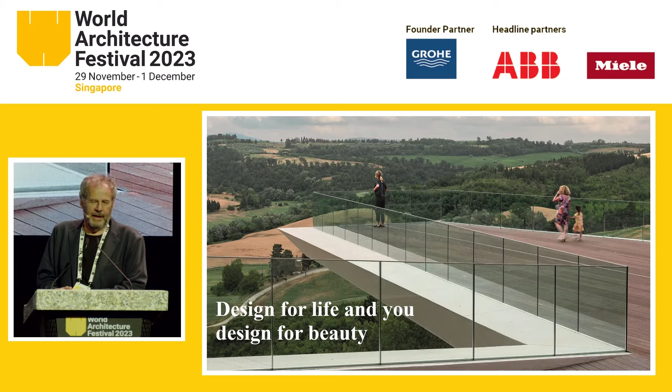So I was just starting to make some of the value of our work, and I always try to remember that we design buildings for the others, not for ourselves. We design buildings for life. And if possible, we design to make a design for beauty.

This is a little project we did in Tuscany. In a historical center, we designed a square which is a cantilever in the landscape, and it becomes the new destination for people as a place for gathering.

Also the question has arisen in the last years about what is the role of an architect. Is it only to answer questions, or maybe help to make questions to our client, explorers and interpreters, researchers and storytellers, analysts and artisans.

So we are also in the line between the analogic and digital world in architecture. How much can we be digital and at the same time artisan, because buildings today are still made by hand. And also our work is made by hand.

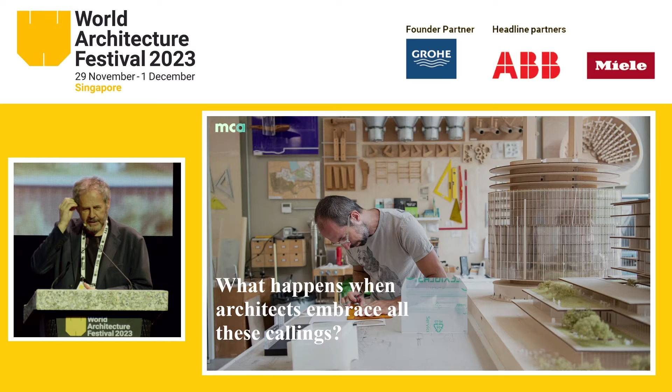And so the question is, what happens when architects embrace all these callings? How can we answer all these new questions? And there are some values which I'd like to share with you.

One is about sustainability. It's one of the key discussions everywhere in the world today, about how we can make more sustainable architecture. And I like to change this word into creative with empathy, which I think is a better definition of what sustainability means.

Empathy is an attitude, an attitude in relation with people. We try to understand the others, but also try to understand the place where you work. Get some information by data. Be empathic with the place where you work in.

At the same time, creativity cannot become extravaganza. If you're using empathy, then you need to combine your idea of creativity also related to the place where you work. So I think this combination is what makes me feel more comfortable about the definition of sustainability.

And also, designing sustainability from every angle is not only about performance, of course, it's about the way you design your building. I strongly believe sustainability is not a technological issue. It's not about the performance of machines, but the way we design buildings, how we design buildings adapting to the climate to get the best relation with energy.

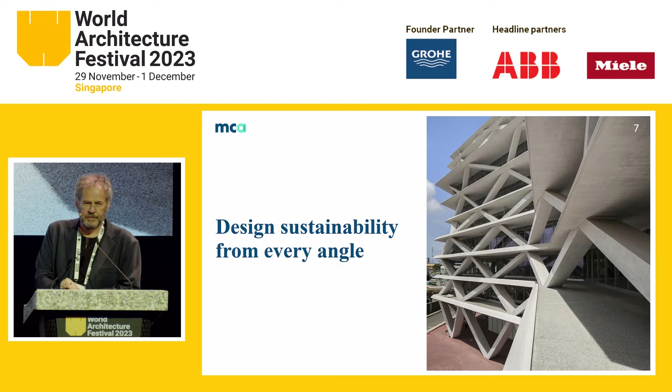You need to know the angle, the direction. All of these things can help us design better buildings in terms of performance results. So I think it's really an architectural issue more than a technological issue. And also, what does beauty mean.

Beauty's concept changes in time. What was beautiful 20 years ago is not today; it's another concept. I think what we're looking for today in beauty also means something invisible. It's not only about aesthetic, it's about what the buildings mean, what kind of relation it's able to create with the place, with people.

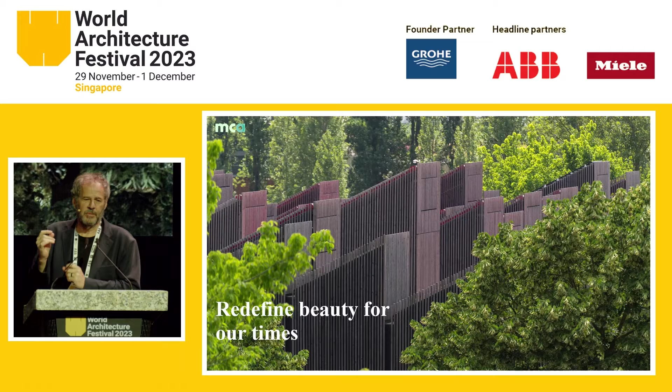This, I will show you later, is a building for the Agency for Environmental Protection. It's designed with 120 chimneys, creating this connection between daylighting and ventilation, which I'll show you later, and also leading the way with open arms.

I'm sure everyone here is a professional, and you know how much our work can become contaminated by different knowledge. I think we need to be quite open to understand other levels of knowledge about communities, technologies, climate, ecology. We need to be open to accept all this knowledge to make better buildings.

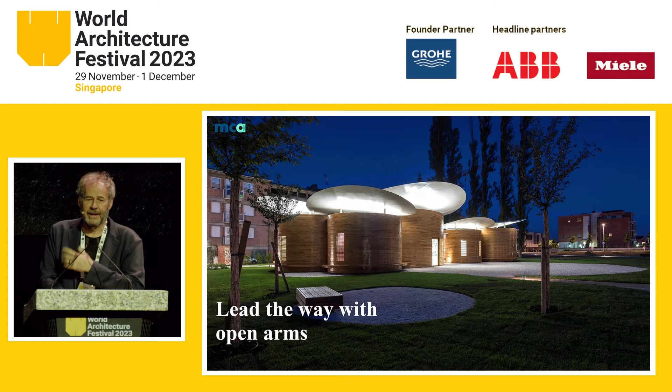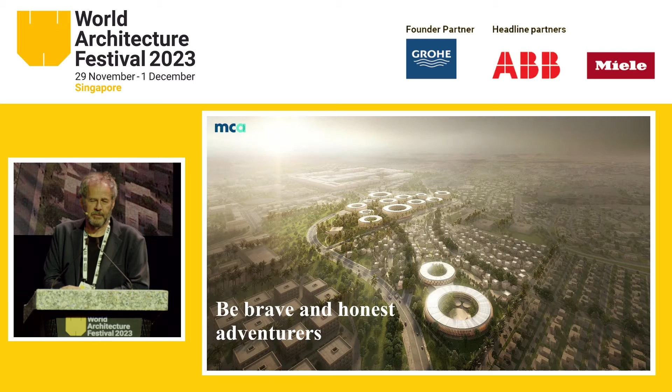For me, brave and honest adventurers means I think we need to be very honest at this stage of our life about sustainability. We are not yet started, we're just in the beginning. So I'm a little bit not against, but it's funny for me to talk about a zero impact building, which is not true. We need to design and build buildings for our life, but we can improve and make better buildings. We need to also tell the truth, the stories about the impact of buildings. Buildings are made for humans.

Just to remind some of the discussion about sustainability, that's why we made this timeline outside, because you can see the history from the past, the very past, see how architecture changed, and then what happened after the Industrial Revolution, and what happened in the last few years.

This timeline is about the starting point in 1992 - actually the German passive house standard was in 1991. Every year, next week actually, COP28 starts in Dubai. Every year there's a report from the United Nations called COP, and every year there's a new regulation. So the road is very clear, the journey is very clear, the direction. And for us the direction is the roadmap 2030 and 2050.

Many things happened, regulations in the countries. Pope Francis wrote an amazing book about our home, the planet, and he said something nobody said before: there's poverty in terms of financial poverty, poverty in terms of food - people don't have access to food - but there's also building poverty. Many people live in very poor quality buildings, and those people will suffer more from climate change, because buildings are really an issue, also in Europe, not just around the world. We need to pay attention to these kinds of things too.

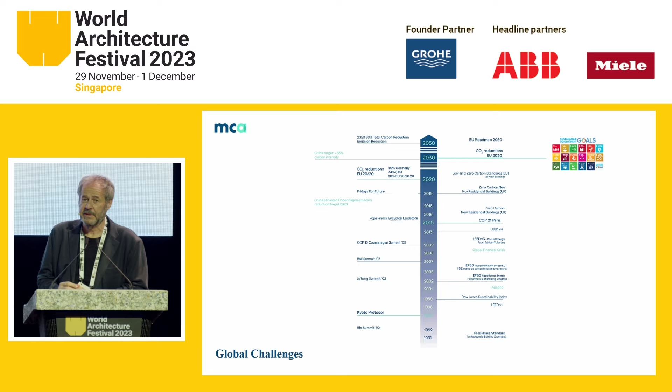The objective for 2030 is reducing 45% of CO2 emissions, and for 2050, 80% of emissions. It's a very ambitious plan. That's what I'm saying - we're only starting to make some changes about materials, designs, and how we can improve our cities.

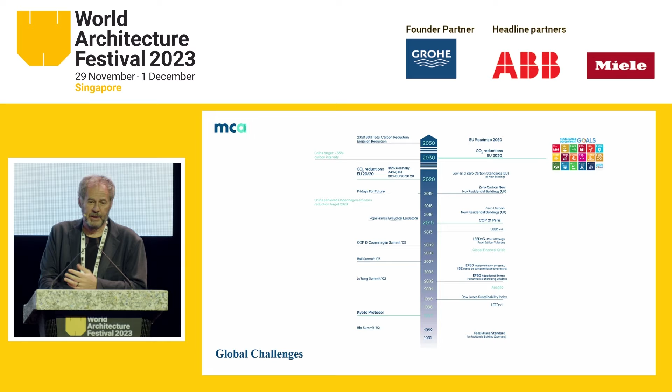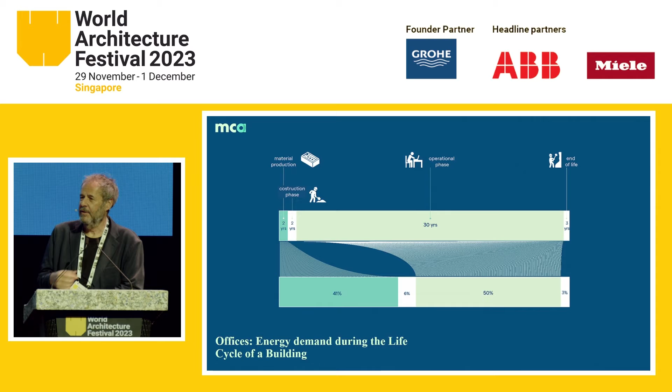One important thing to know is that we are very concentrated on the performance of buildings, the consumption of buildings. But if you see this diagram of the life of a building over 30 years, half of the emissions are related to the material, the construction. We've done a lot of work on performance - we can make buildings at 7 kilowatts per square meter per year, whereas 20 years ago it was 300 to 400. But we need to do a lot of work on construction materials, the new generation of steel, concrete - there's a lot of work on recycling. So the effort now really goes into the life cycle of material.

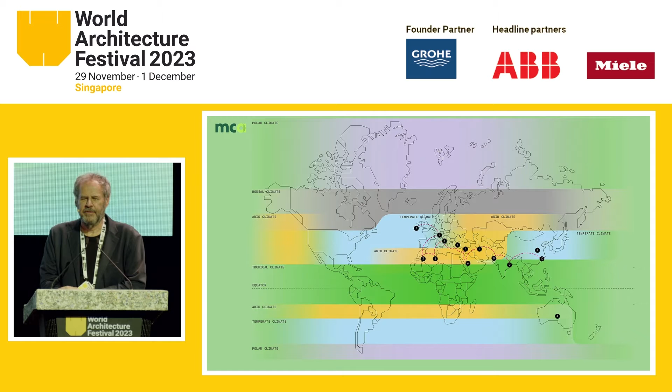Going back to history, which is the major argument of today - I was writing this little booklet called 'The Future is a Journey to the Past.' You can find it in the bookshop if you like. It's 10 stories about architecture, because I was thinking to make a trip for my 60th birthday, then COVID of course canceled all these things. I thought to make a trip from a place I already knew, from the north of Ireland to China, and finally through Asia, Africa to China. There are 10 buildings which I find very interesting to study.

For very simple reasons: how did we make buildings before the Industrial Revolution, with no energy? What happened before? Because now we concentrate on performance, energy, machines, but how did we do it before? There's a story of buildings before the Industrial Revolution where we designed buildings in an empathic way with the climate, because that was the only energy available, and we connected energy, buildings, shape, aesthetic - because that was the rule of architecture.

So I'll only tell you two stories. One is the Hiding or Invisible City. Then you remember this film, Skywalker comes back home and finds all the family dead.

This photo is taken in the desert of Tunisia. And George Lucas, when he's writing this film, said 'a long time ago in a galaxy far, far away,' which means we already live in another galaxy.

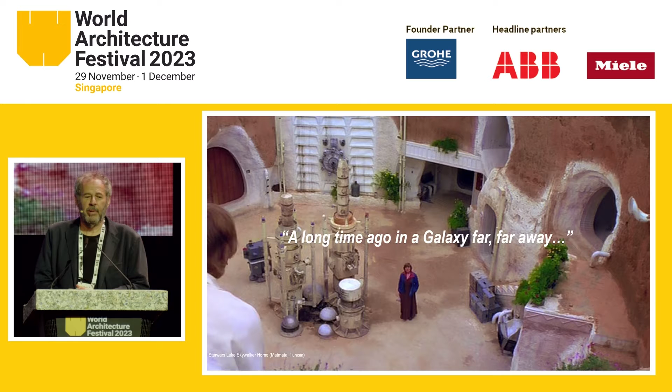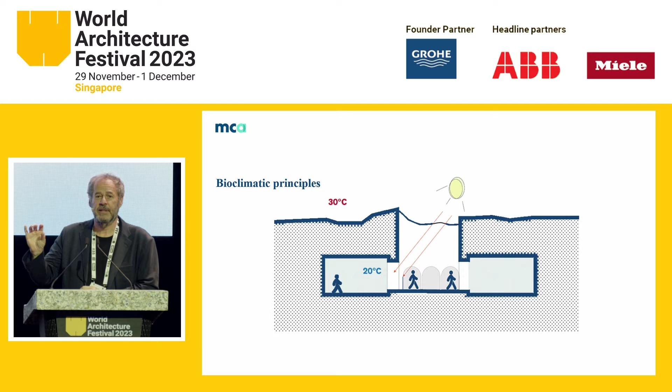Back home on the planet Earth, the most modern place on the planet was this house in Tunisia, where the Tunisian people, like the Chinese, built their buildings underground for a good reason: the rock was easy to excavate, and outside there would be 30, 40, 50 degrees, but inside the temperature is constant, between 17 and 20 degrees.

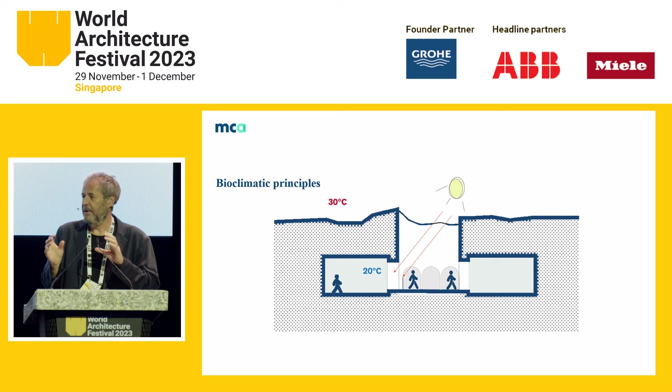But they open a little courtyard for ventilation, creating a condition that is not against the climate but an answer to it. The Chinese made amazing cities too, what we call a hiding city in Henan province. It's so beautiful - a courtyard as a common space, with all the rooms around, and a garden on level 0.

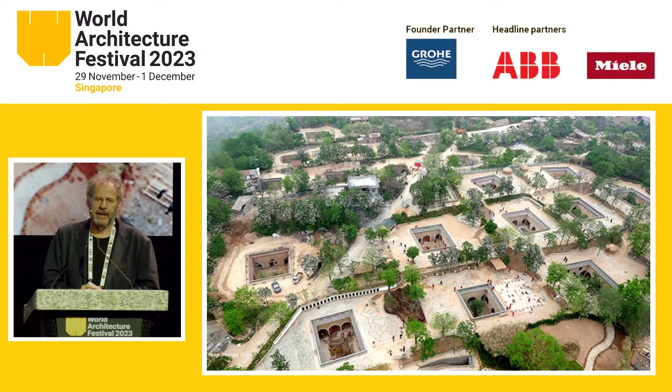I thought we forgot the complexity in the way we did buildings. There wasn't only one way, there were so many ways of adapting to the climate. I'm fascinated by this because I think we lost a bit of this complexity. We build buildings the same everywhere around the world, independent of climate. And I like the idea that there was a story and knowledge.

Why am I interested in this, not to do it again, but in the way the people were thinking. They were thinking about how to deal with their climate, with this material in that specific context, and give you an answer. And the most interesting thing was...

Marco Polo - the story is from Venice to China, crossing all of Asia. And then when he went back to Venice, sailing the South China Sea, Indian Ocean, arriving in Hormuz in Iran, then going to Constantinople, Istanbul - he says in his book that he went to a desert village, and the people offered him ice cream.

That was the 13th century. How could people make ice in the desert? This is a crazy story, no? Because you need a lot of knowledge to do it.

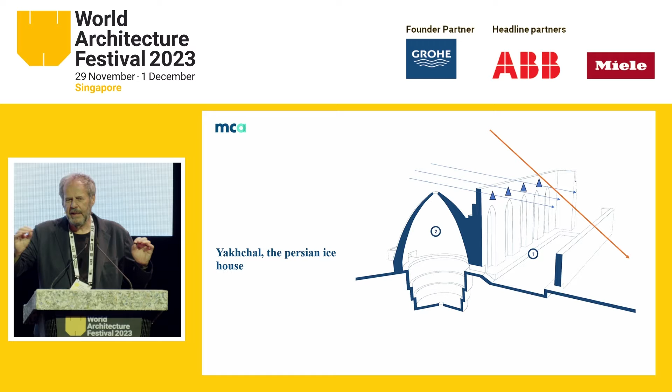The people in Persia took 300 years to understand this. They build a wall that can be 100 meters long, and behind the wall is a shallow pool, and behind the pool is another wall. You see the orange line is the winter angle of the sun - behind the wall, there's no solar gain during the day.

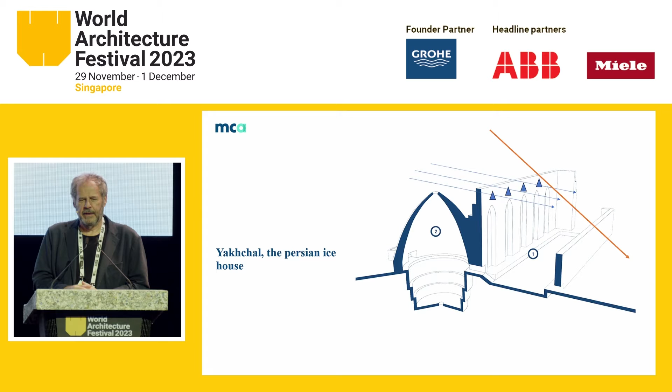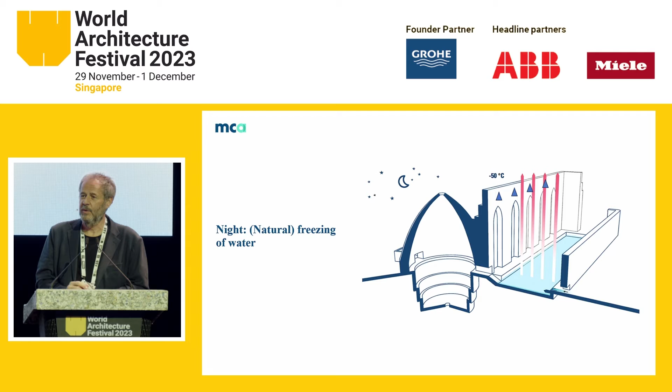Then in front of the wall, they make an excavation, a dome and a sort of tank. So what happens is they put water in at night, very shallow water, and because the sky is minus 50 degrees, the effect of the cold sky sucks all the heat from the water, freezing it.

Night after night, in this pool, the Persian people take a piece of ice and put it in the tank. Then in summertime, the dome protects it from solar radiation by ventilating the place, and they make this called a yakhchal, which still exists in Iran - there was ice cream with noodles and fruit.

So I was shocked by the way they already had many principles of thermodynamics - freezing from the sky, ventilation, air speed, the aerodynamic aspect of the design.

But that is the scale - you see the scale, it's huge. So I think they were very ambitious also in the way they made these things.

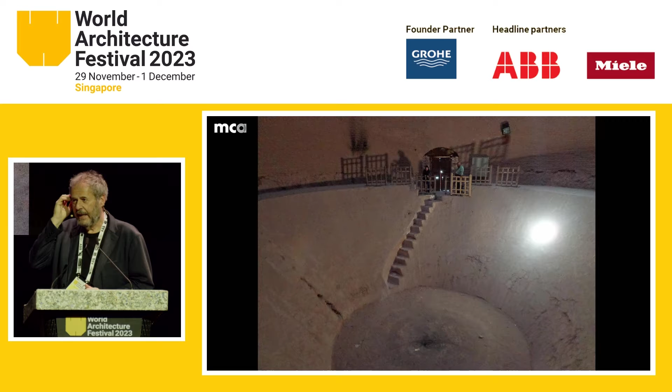And of course we make ice much more easily today, we're not going to do that again. But I'm fascinated by the people who were thinking - they could make ice by studying cooling, then maybe design a wall, and then protect it. So it's the process of thinking.

I think we need to think again, because if we want to do zero impact building, you need to find again this empathy with climate. You can't do it without this kind of thinking. That's why I'm fascinated in reading that.

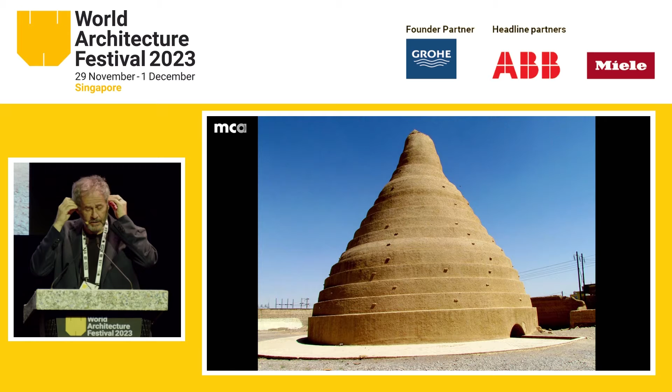There are many beautiful stories in India, in China, in Saudi Arabia, in North Africa. You can read that a little bit - in the booklet there are 10 stories. I don't want to sell you the book, but if you get it, you can find many stories.

There's also another place where we can find inspiration for this idea of sustainable buildings, and that's the world of plants. Plants have been on the planet for 450 million years. We, Homo sapiens, for 300,000 years.

We're able to make a lot of damage in this time, but anyway, that's our stories. The adaptation of plants to climate is 450 million years old.

Professor Mancuso, if you look on the internet, has video experiments showing the intelligence of plants, because it's a neurology for plants. So it's believed that plants have another level of intelligence.

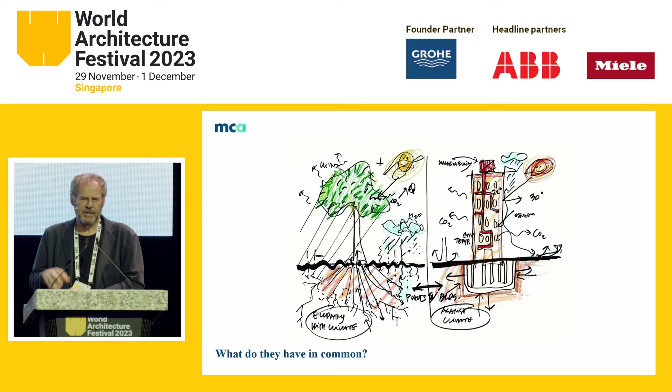And how we've been building in the last decades, maybe now it's improving, but we are against the climate. We don't want to know what's happening outside. We seal the building, use a machine, and we don't know whether it's raining or sunny, it doesn't matter. Then the foundation, I don't want it connecting with the earth, with temperature, or with anything. So we design buildings really against the climate.

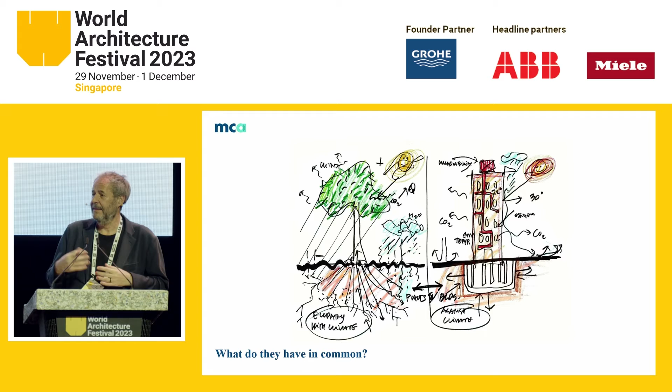So now the point is how much we can learn from plants to make better buildings. And I think plants can tell us so many stories about adapting to different climates.

The shape is a sphere, so half the plant is under shade during the day, it's not under sun all the time. And the leaves are triangular, so between the leaves there's a shading part where the temperature is different, meaning ventilation between the leaves.

When it's very hot, the top of the plant is white with a very thin spine, because that's the point where the sun is much hotter. So it's reflecting the light that's not absorbed by the plant, and the spine on the leaves — of course they defend against animals because it's juicy, but also the spine takes water from the air. So when the temperature changes, the little water in the air condenses at the top of the spine, and this drop of water goes inside the plant.

The question is, how does this plant know? How do they know how to adapt themselves? Behind the shape, behind the way it's made, there's a strong connection with that climate. This plant is able to survive in such a difficult context. So we are very far away from that knowledge, very far away.

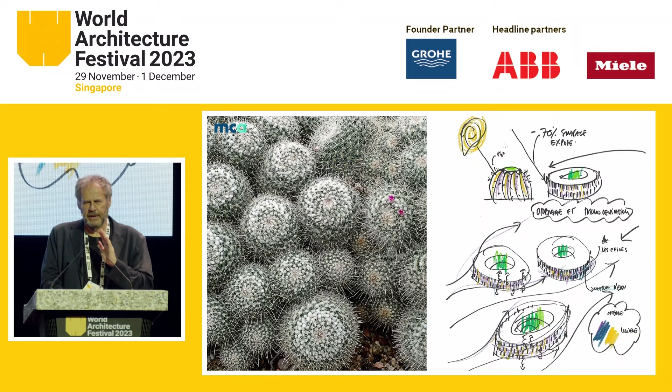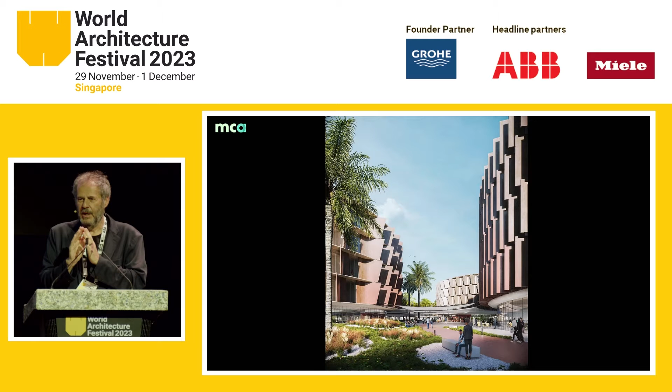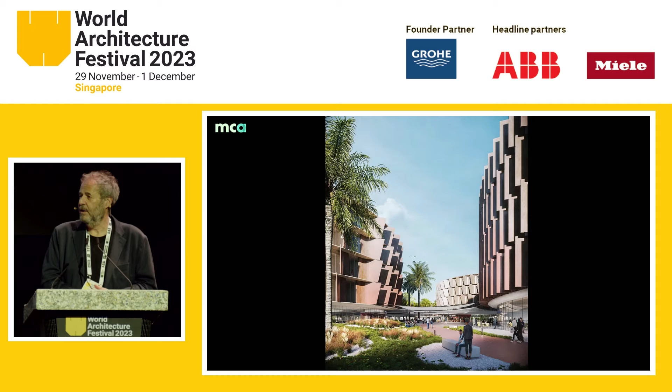So we designed horizontal shades around the buildings, creating a sort of light and shadow, light and shadow. So all the facade is under shadow, but there's also a microclimate between the small pieces of terracotta shielding around it. So I think we don't design a cactus, but the cactus tells us a lot about how we can design our buildings.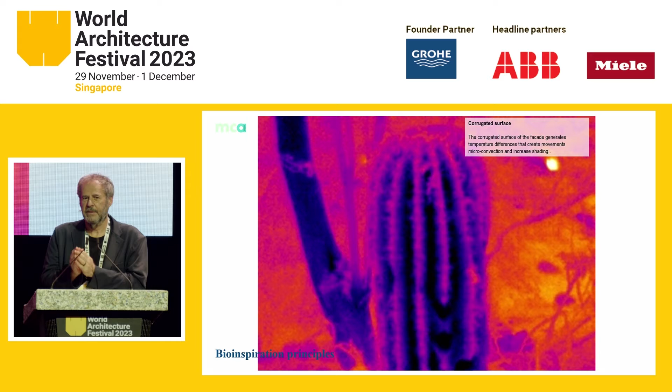And of course, you can see this thermal picture — you see the difference between the red and the darkness. That's the temperature difference between the external surface and the leaves, meaning that shape is made to survive in a very difficult context. So it's about the design of this plant. And that's the courtyard, using recycled water, the only place we can plant trees.

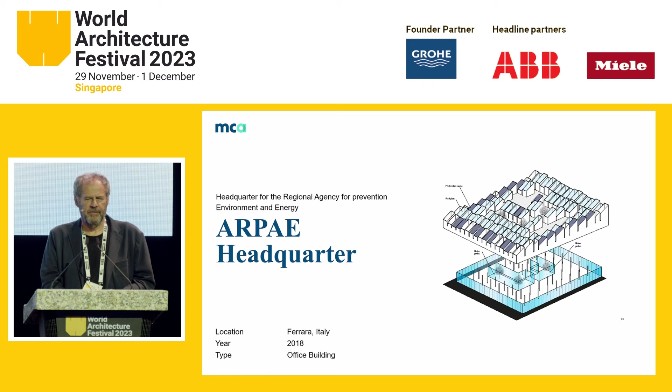Just to give you another example of this connection, we designed this building for the headquarters of a regional agency for environmental and energy prevention, inspired by this city in Pakistan, which is a wind-catcher city.

They catch the wind at night with this kind of kite, and the wind gets inside the house, keeping this cool air during the day through the thermal curve — it gets given back as cooling over 7 hours. So during the day there might be 50 degrees outside, but inside it'll be maybe 4 or 5 degrees less, which is a lot of energy. It doesn't matter the exact numbers, it's the difference between the temperatures that gives you comfort.

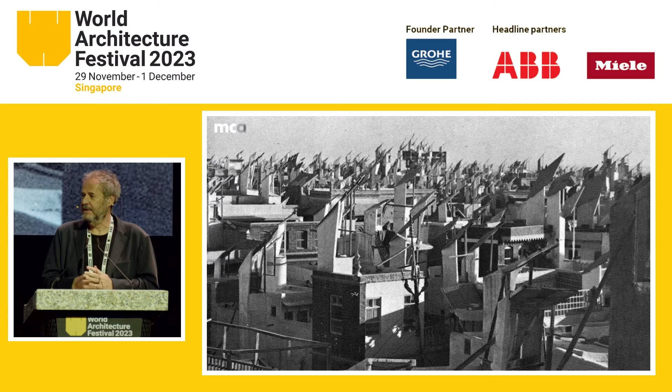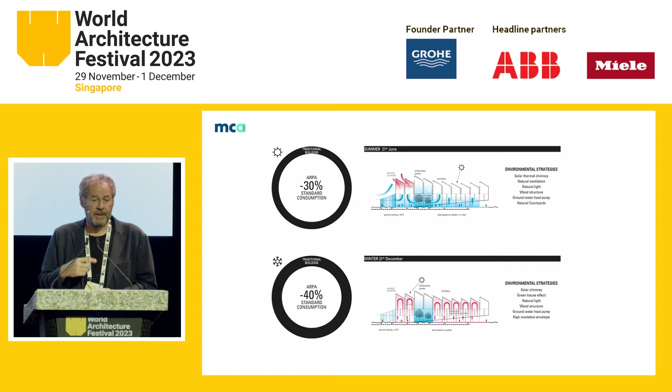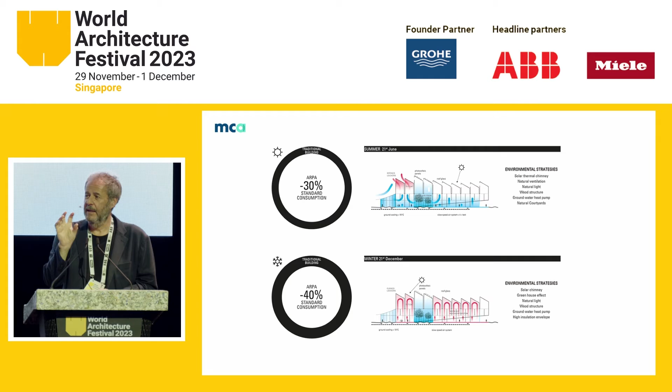So we designed this building with 120 chimneys, which improves the daylighting — it's an office and laboratory. At the same time, in summertime, it increases ventilation inside the office by taking cool air from the floor and exhausting the hot air. At the same time, in wintertime, we can use the glasshouse effect and heating from the sun inside the building.

That's, of course, not enough to make a zero energy building, but reducing 30% of cooling and 40% of heating has a huge impact on the size of the machinery and the kilowatts consumed, only from the shape of the building. It's all wood construction, prefabricated, so very quick to build.

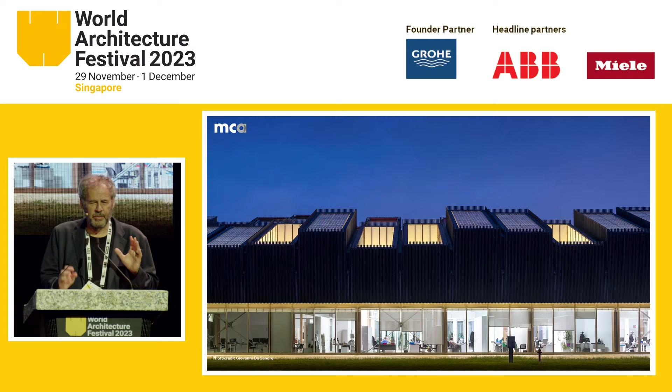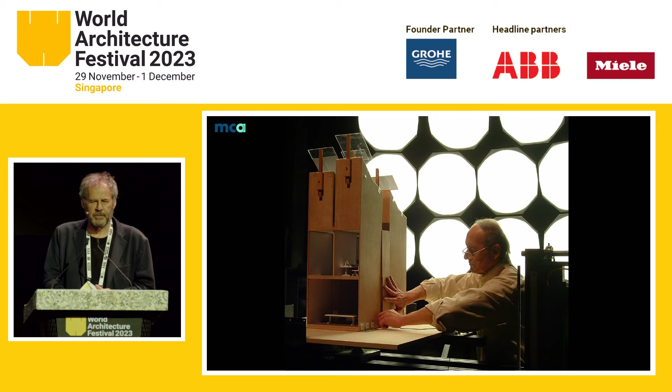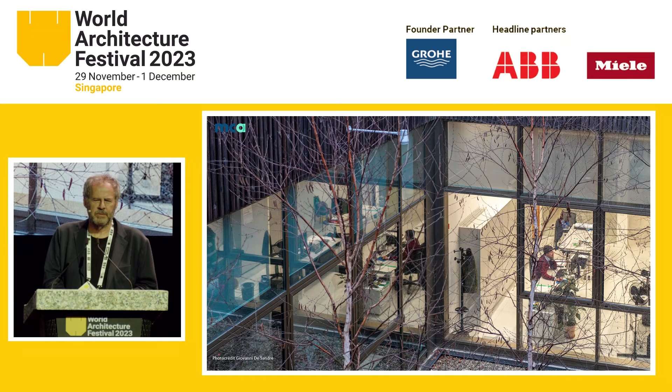And then we do daylight analysis. Of course, today it's easy by digital program, but we did for many years by using artificial sky to analyze the quality of the day and the intensity of the light. And there's very sober, very simple office buildings.

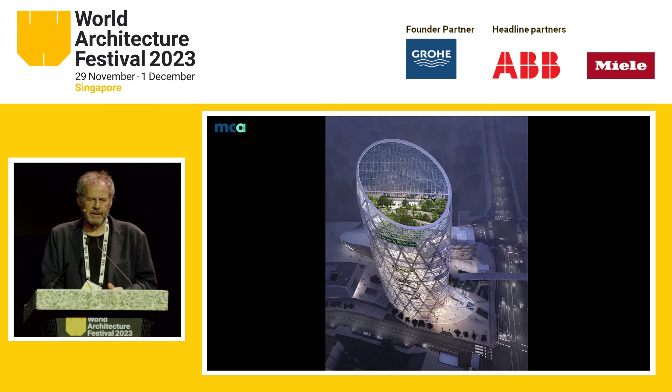And then with the same principle, we are now almost finished a tower in Milan, which is complete now. There are another few months, but it's finished. It's in the city center, and particularly the shape of the tower is facing south. The south face of the tower is a problem in the wintertime when the sun is low. It gets inside of your tower, and then what you normally do is you close the windows and put on the light.

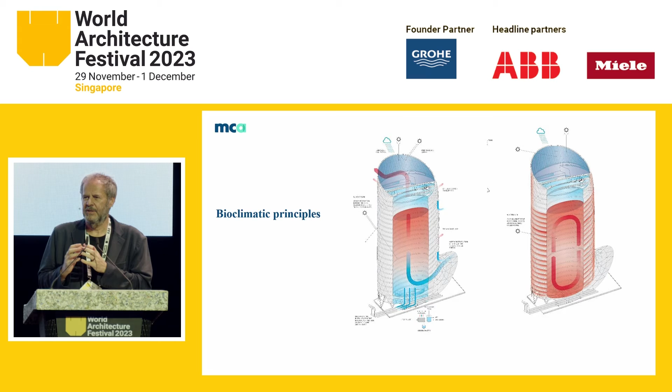So we made the south face of the tower an atrium of 17 floors, empty, and we're using this empty space as a climate moderator. So reusing the heating in the wintertime, and also ventilating and recuperating the heating in the summertime. Of course, that's not enough to make a free-running building, but again, the shape of the building is suggesting this kind of strategy with the shape of the building.

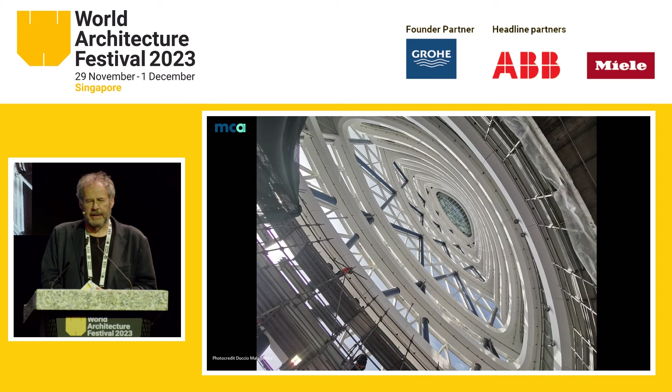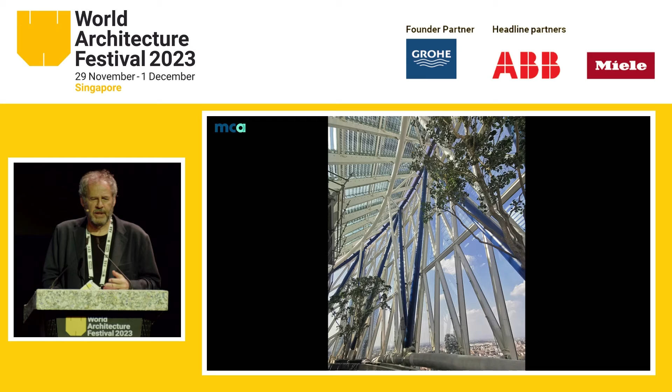That's the atrium, but that's almost finished. And the top floor is a glass house, not a conditioned place, and is like a very large lounge. We're now planting trees, and the photovoltaics is on the roof to shade the building.

So just an example of how much the design can be influenced by this kind of relation. It's pure geometry, but adapting to different conditions, because at the top it was cut by urban regulation by 60 degrees, so we stretch the tower, creating this sort of ellipse. And the bottom part is a piazza, and the facade changes shape, adapting to the public space.

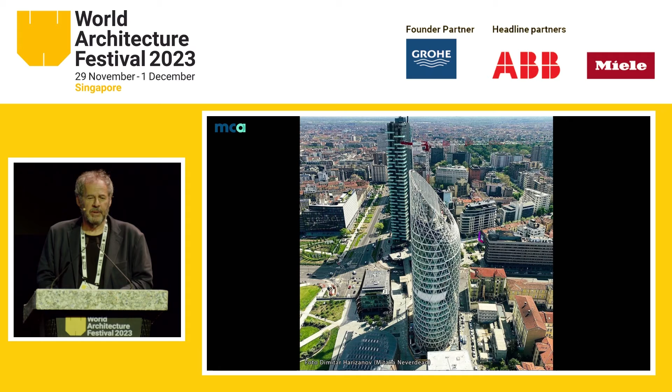This is almost it. We have the last two projects, and then we'll have a chat with Jeremy. We just completed a museum in Milan, made for an Etruscan collection of art. And the most interesting part of the museum, apart from the shape and the objects, is the content.

The story of objects produced by Etruscan artistic or artisan work was to help people in the journey to another life. This is the beginning of the religion. We are in 10 centuries of civilization, between the 10th century before Christ until the Roman Empire. And this collection is about the 4th and 5th century before Christ - the black vase, shiny black vase.

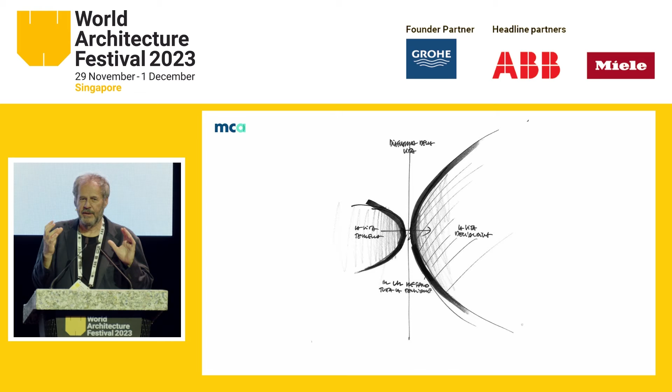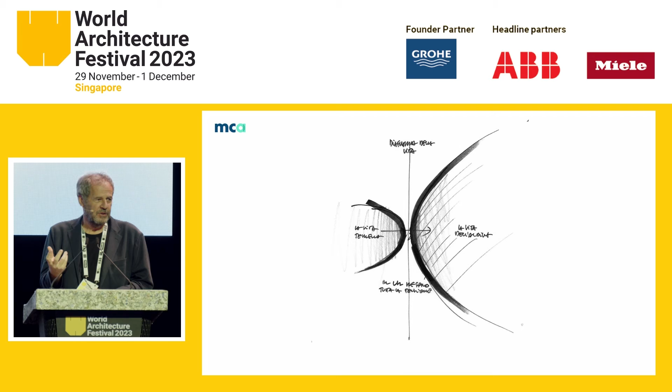But why did they make that? Because they believed when you finish your last breath, you're dead, but you're not dead. You just start your journey in another life. And all the art of this period is made with this idea - producing objects to accompany people to another life, to join their family in another journey. And that moment of the breath is the moment of artistic tension.

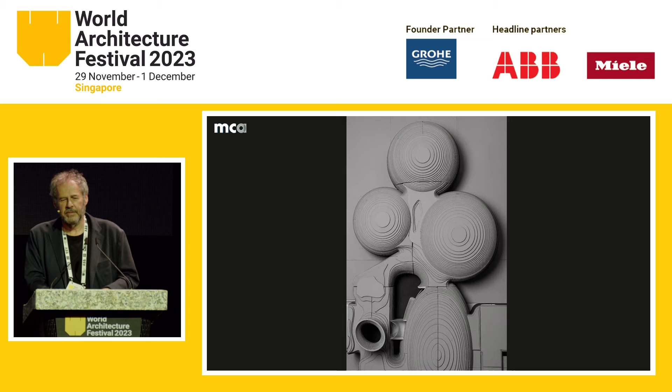And there are some amazing pieces. This is a 40 centimeter warrior in bronze. And these are the tombs of Cerveteri, which are the only architectural remains from that time. So we designed this as an underground building, a museum. The building has an existing structure, and it's underground of this existing building.

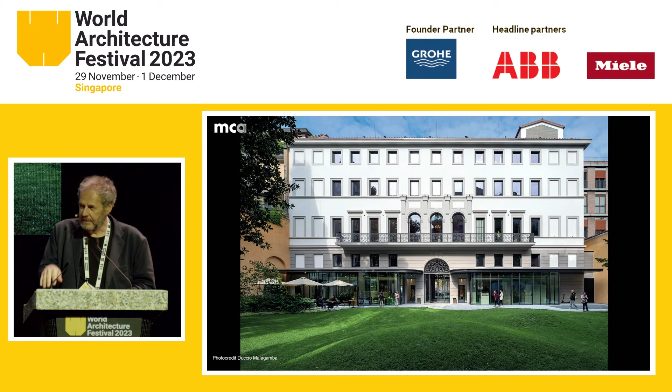You can see the dome coming out of the garden, showing that something happened underground. Underground is the level - you go down from a little stairs to a little bit of darkness, because when you go inside, there's no time, the space is all in stones, and there you can see the pieces.

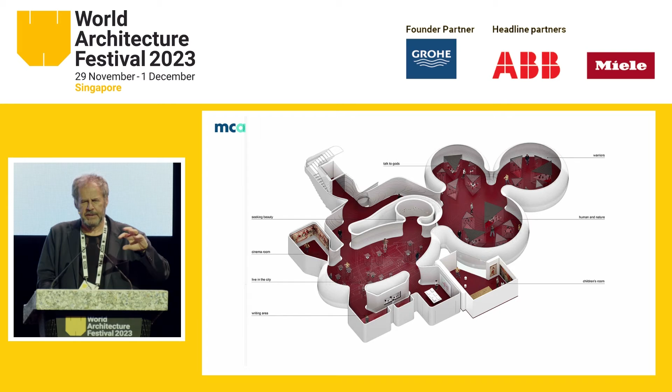And then you discover this Etruscan culture through stories, space and objects, and then you go up to the first floor, which is contemporary art. So it's a journey to show that art is a fluid in the story of humanity. Can be an object made 2,050 years ago, and you can see a Picasso, which is an object done maybe in 1950, connecting with this history. So the story of art is a fluid of humanity, and I think this museum tells these stories.

It's divided into different sections about war, about life, about their beliefs in some God, and then is the museum. It's all made of one stone, limestone, called Pietra Serena. There are 29,000 pieces of this stone around you, and it makes the feeling of the space.

You need to feel your underground. The sound inside is different - it's a little echo, because when you walk underground, it's a different feeling, and the material feeling is different. And there's a gap between the stones of 3 millimeters, so the air comes from the floor, from that gap, a light gap, and the air is drawn from the stone. So there's no equipment, no technology, nothing - you can visit, because you're concentrating on the experience of the space and the object.

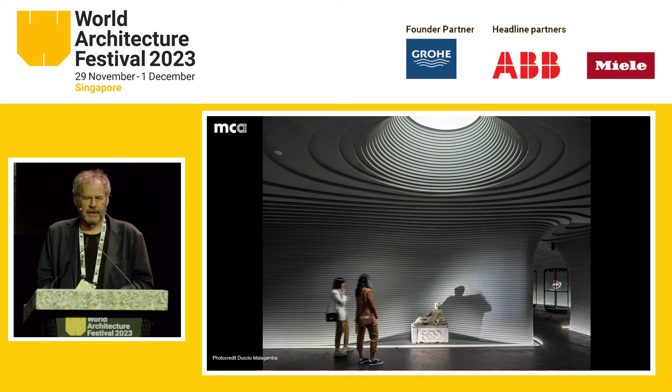That's it. And I design every single piece, every exhibition. I think it's a little short video, 1 minute.

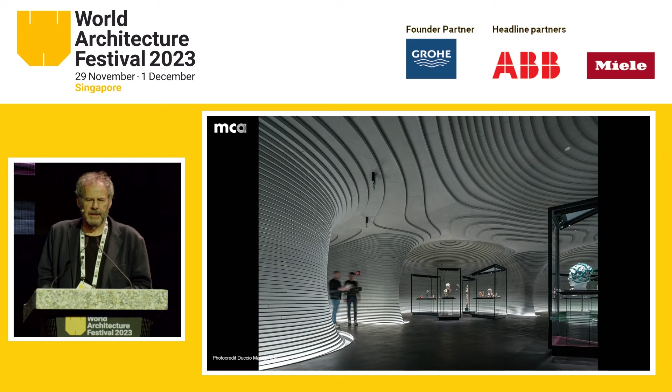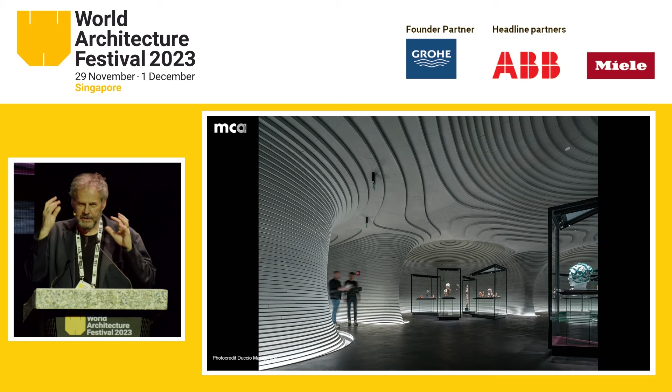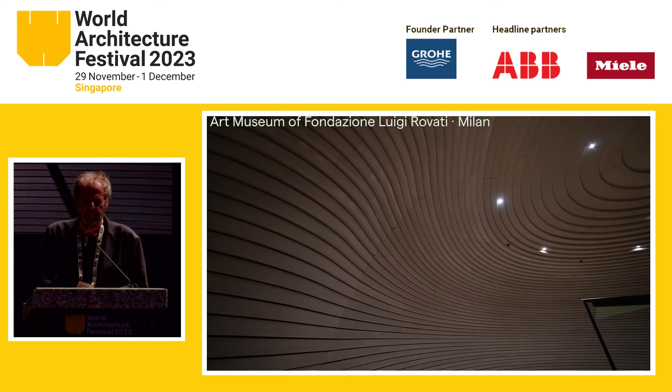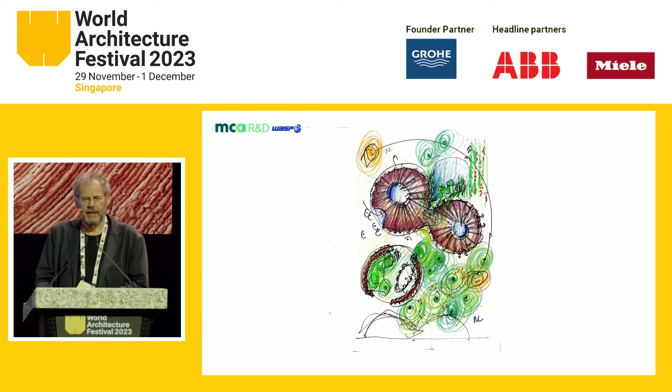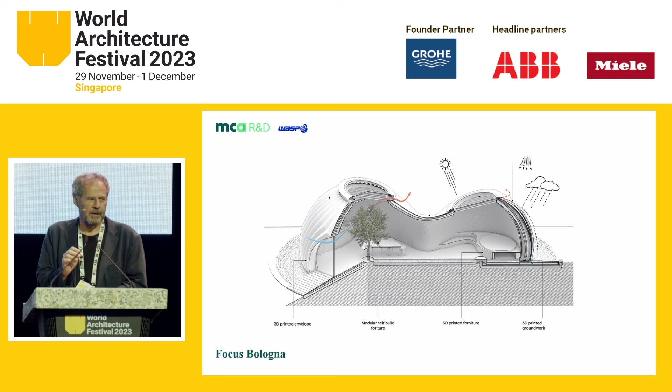And the last project, which connects all the stories I told you, is this house with 3D printing global habitat. We built a house using 3D printing, but using earth, not cement. It was the first time they used this material, and I think the combination was using the latest technology with the oldest material on the planet, one you can find everywhere. But it's again about the way you design this house for that latitude.

And also because it's made by earth, the life of this building can finish and go back to where it came from. So there's no pollution, it goes back to nature, and nature is always working to give it back.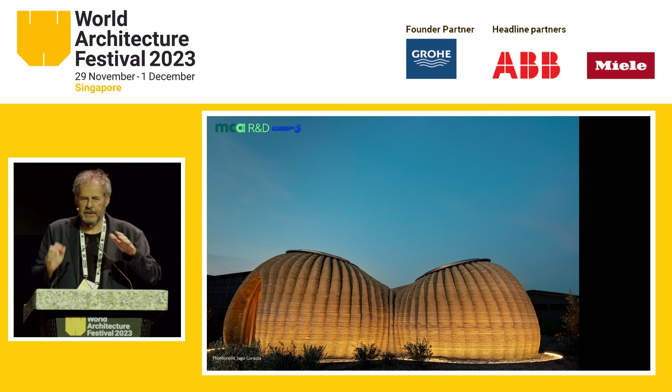But the shape of the house is also made by the material. You're printing wet earth, which is not solid, it's wet. So the curve is the maximum curve before the shape collapses. It's inspired by the cactus, and this little facade also collects water.

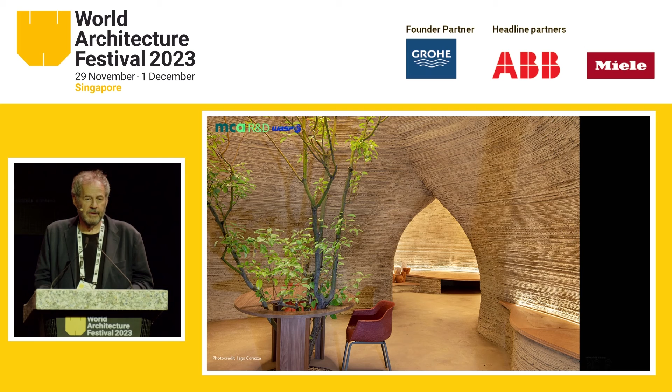Inside, you can get the feeling of how it was printed. But I think the most interesting thing is the feeling you have when you get inside. I think the body recognizes what is concrete, what is wood, or what is earth. It's a reaction, no? For me, at least, the experience of the earth was very, very emotional.

And that is the video showing how the printing was done. You can see the thickness of the wall, which is for ventilation, but also because there's no structure—it's made of mud, and that's the way the structure of the walls works.

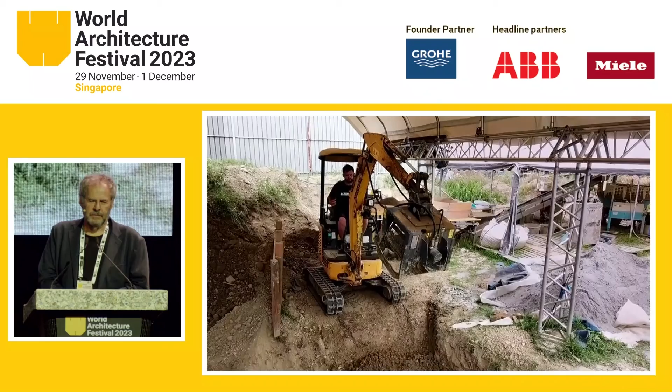And you know, wasps make their nests using terracotta.

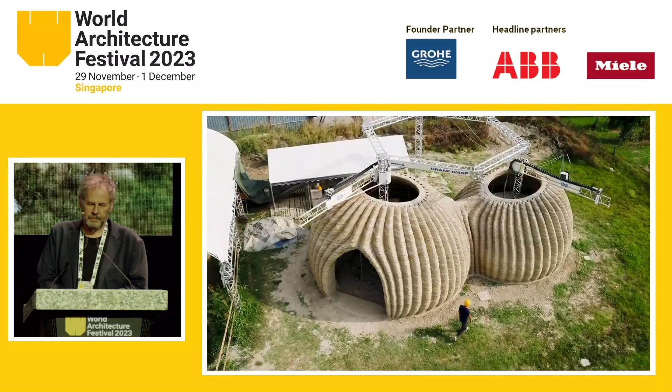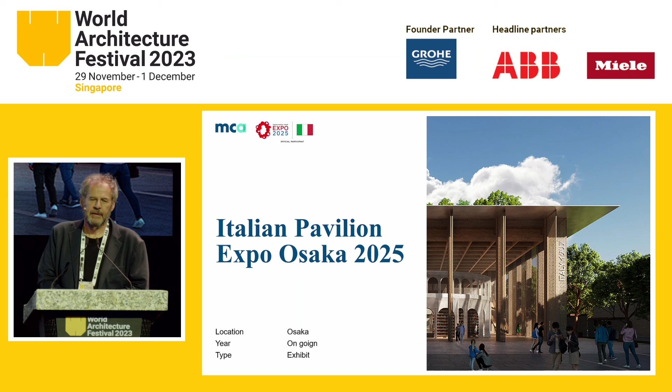And just to finish with some news, we are just starting the design of the Italian pavilion in Osaka Expo 2025, which is a great experience for us. I'm not going to show it all, but just to tell you something—I tried to see, given that the Expo is a very pop event, there will be 30 million people visiting the Expo, and maybe 3 million visiting the pavilion. What kind of message can we give them?

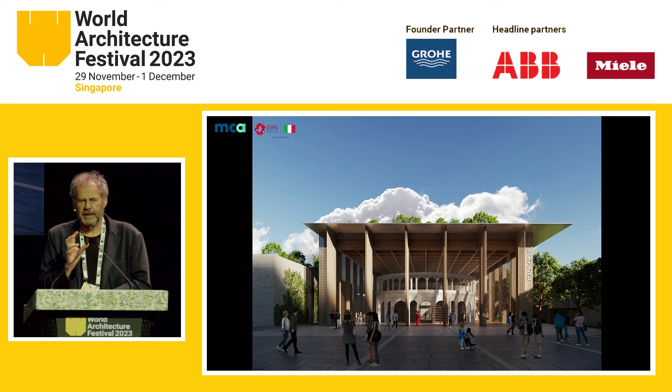I thought the DNA of Italian architecture is this kind of portico, like a hangar, a very large space. And then what you can see is a theater, because theater is the first virtual reality built centuries ago. It's the only place where you can go and travel in another time, another space. So we made these kinds of images of the theater representing the culture of our country, but at the same time it's the idea of the ideal city.

I think one of the interesting stories is that we all try to design a city of the future, what we call the ideal city. From the 15th century there was a representation, the first time after medieval times, of a picture of what the city of the future would be. It was only architecture—there was no human, no nature, nothing. And also the discovery of geometry. Every century they investigate what will be the city of tomorrow—I think it's one of the major discussions of today.

So it will be a trip, a sort of journey from the past again, showing what will be our idea of our time, how we can imagine the city of tomorrow. That will be the story from the foundation of Italian cities to the future cities.

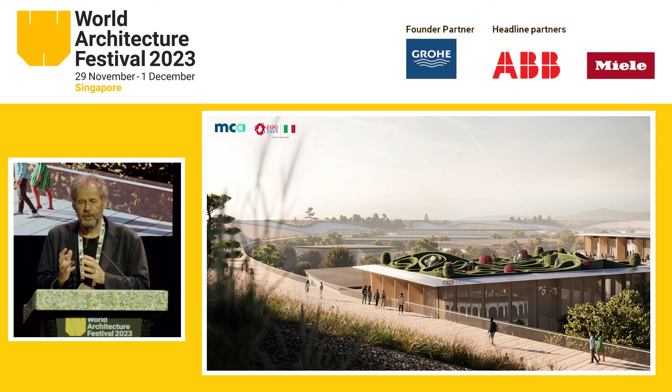And gardens are part of the story of the landscape. So the roof is a garden, an Italian garden with a new interpretation, because the Osaka Expo has built a ring, a promenade at 12 meters high, so you can see the pavilion also from the top of this promenade. We just started construction, starting in 3 weeks in January, and it will open in April 2025.